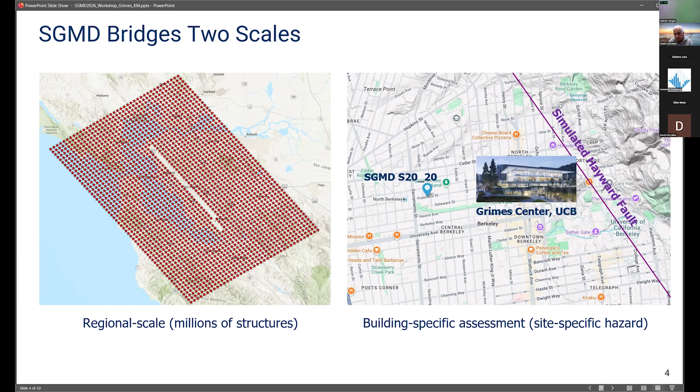One major strength of SGMD is that it bridges multiple scales. At one extreme, we have regional scale hazard affecting millions of buildings. At the other extreme, building-specific response and condition assessment can take place. The Grimes Center is located near a specific SGMD site, site 2020, in Berkeley, and similar to the BART study that I presented earlier, this creates a near collocated relationship between the actual structure and the simulated hazard environment. This is important because it allows the building assessment to remain geographically meaningful rather than relying on generic motions selected from unrelated locations.

The Grimes Engineering Center, for those who do not know, is intended to function as a living lab for resilient design. The project is not simply a design exercise nor an experimental study. I overlooked to acknowledge the SOM engineers who are the designers of the building, and we worked very closely with them. It's actually not design of a building, it's design of the modified building, because the Grimes Center is built on the old Bechtel Center. So SOM were the designers and the ones we worked with closely on this project.

So as I said, this project is not simply a design exercise nor an experimental study. Instead, it creates a closed loop framework: design, test, validate, and improve. Or at least improve in the sense of better understanding of the functionality, the recovery potential following an earthquake. The building is less than a quarter mile from the Hayward Fault, so earthquakes are going to happen, and we're going to see data and results and response.

The building integrates advanced systems, sensing, experiments that took place prior to completing the design, and physics-based simulations. This type of integrated workflow is increasingly important for resilience-oriented infrastructure.

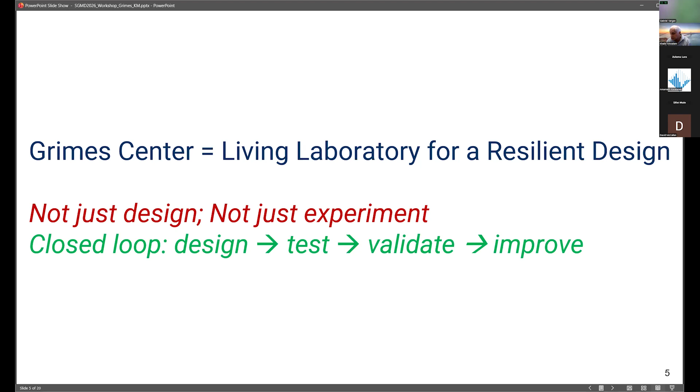The Grimes Center was specifically designed for resilience, rapid recovery, and immediate occupancy after earthquakes. This represents a major shift from traditional collapse prevention philosophy. The objective is not simply to prevent collapse. The objective is functionality, operational continuity, and minimizing downtime. This becomes essential for critical facilities, research buildings, and community infrastructure.

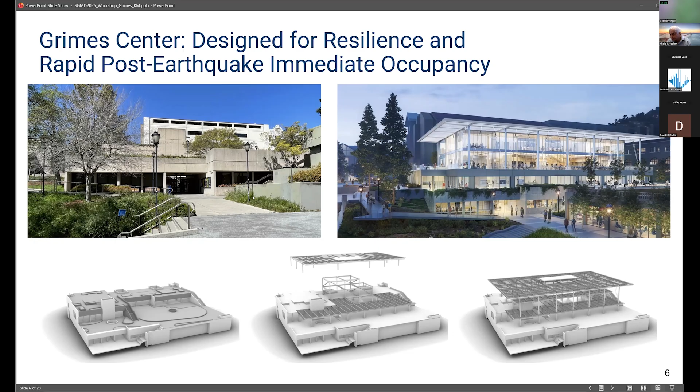This slide here, from SOM, shows the evolution of the structural system. The design progressed through several stages, starting from existing condition, adding buckling restrained braces, interior frames, adding new levels, incorporating shape memory alloy perimeter frames, and ultimately adding the roof structure.

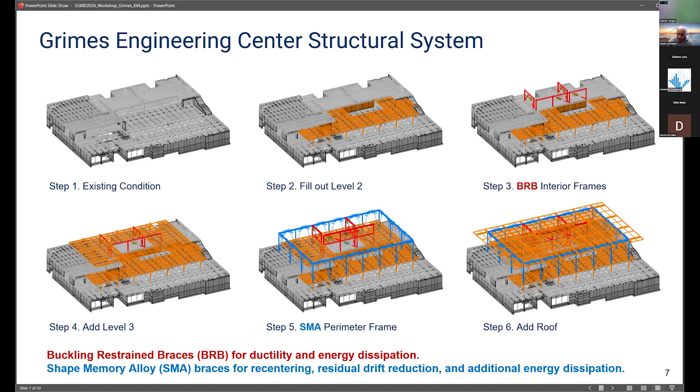Two key systems are central here. First is the buckling restrained braces, or BRBs, which provide ductility, stable hysteretic behavior, and energy dissipation. Second is the shape memory alloy systems, which provide recentering, residual drift reduction, and additional damping. The combination allows the structure to dissipate energy while also limiting permanent deformation.

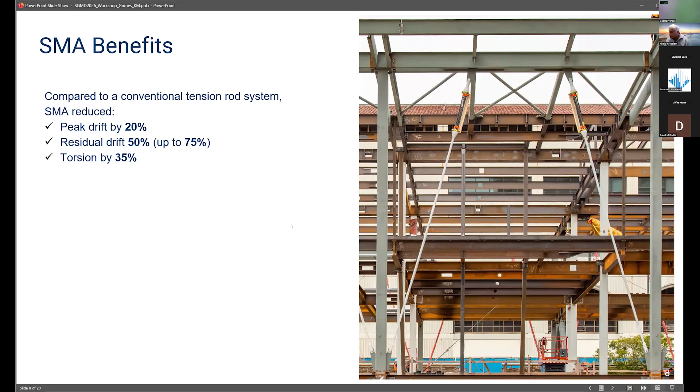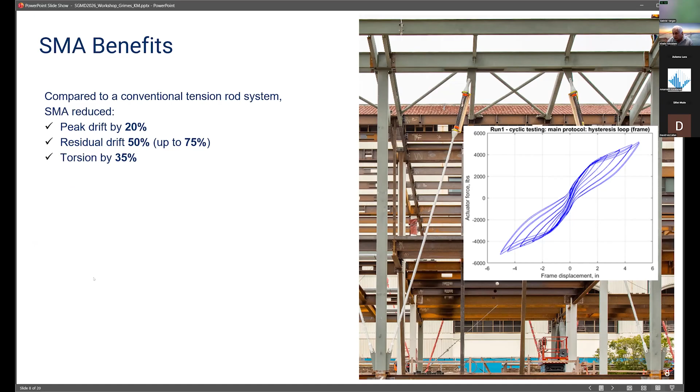This is a summary of the benefits observed from the SMA system. You see here some of the experimental results that show the recentering capability. And the SMA are these cables you see on top here of this tension rod that go all around the perimeter of the building. So compared to conventional tension rod system, peak drift was reduced by introducing the SMA rods. Residual drift was reduced substantially, torsion decreased, and floor accelerations were lowered.

And that's important. The building houses this artwork that's called the Cube, which has thousands of LED lights which serve a particular educational function, which I don't have time to explore today. So it was important to pay attention to that and to have the floor acceleration being lowered, which is very important for functional recovery and so on.

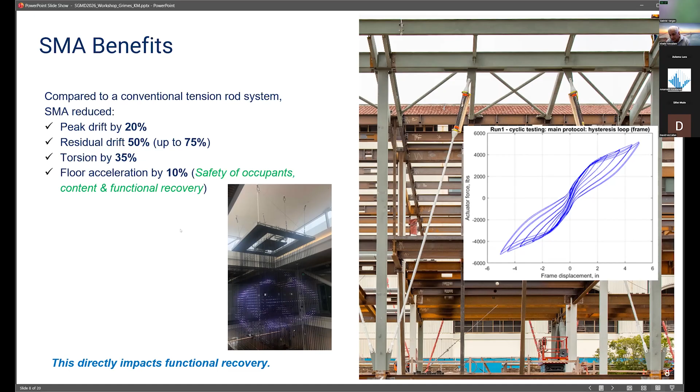The residual drift reduction is particularly important for functional recovery in addition to reduction of the floor acceleration. Many buildings survive earthquakes structurally, but become unusable because of excessive residual deformation. Reducing residual drift directly improves repairability, reoccupancy, and ultimately resilience. This is one of the strongest motivations for advanced resilience systems.

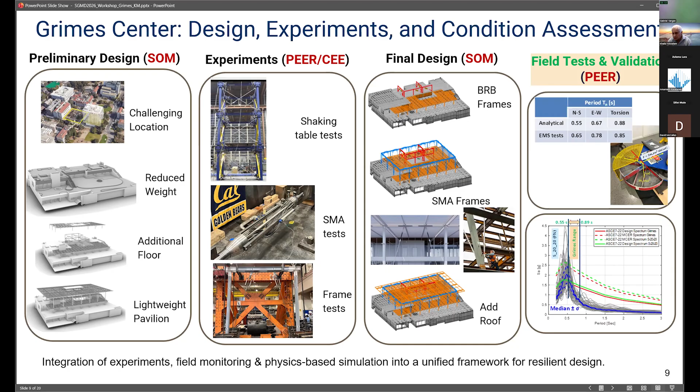The important idea is that resilience assessment should not rely on a single methodology. Instead, resilient design increasingly requires integration across experiment, simulation, sensing, and operational monitoring.

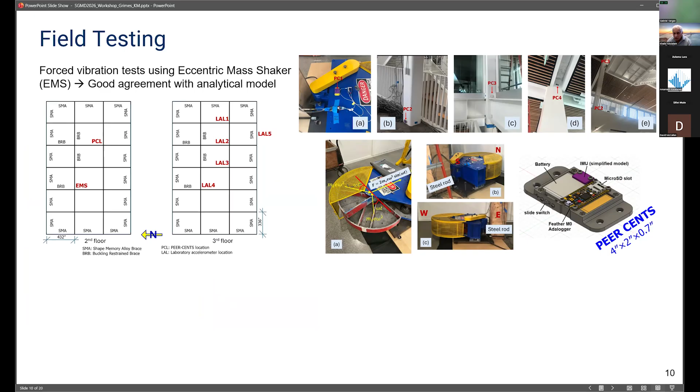Here is a summary of the field testing, also using PEER CENTS that I mentioned when I talked about the bar tests. And here we used an eccentric mass shaker to excite the building after it was constructed. The objective was to identify modal properties, natural frequency, and validate the analytical model. And results were very promising. The measured response showed good agreement with analytical predictions done by SOM engineers. So you see here this table. The field validation is critical for digital twin concepts and longevity of this monitoring and continued learning from this living lab, and of course for resilience-oriented assessment.

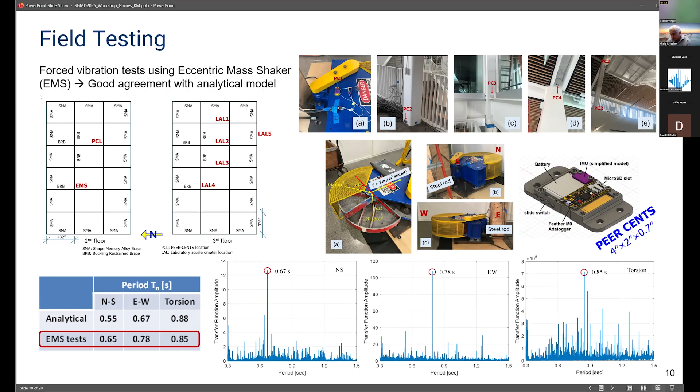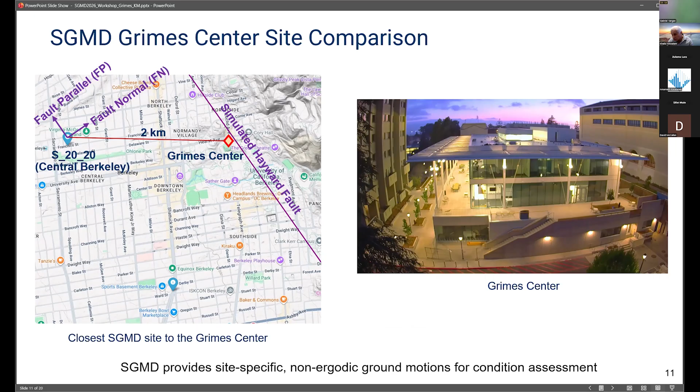As I mentioned, the building is less than a quarter mile from the Hayward Fault, as you see here. The motions, therefore, that we use preserve local site effects, source to site geometry, and the near fault characteristics. This allows SGMD to support, as I mentioned, non-ergodic, geologically meaningful site-specific assessment.

Here we compare SGMD spectra with code-based design and maximum considered earthquake response spectra. An important observation is that some individual motions, here we see the 50 realizations in gray, and then the median plus standard deviation compared to the code. So we see some individual motions exceed MCER near the dominant structure period, which is in the vicinity of 0.6 to 0.8 second. It shows the range here. While the median behavior aligns well with the code spectra.

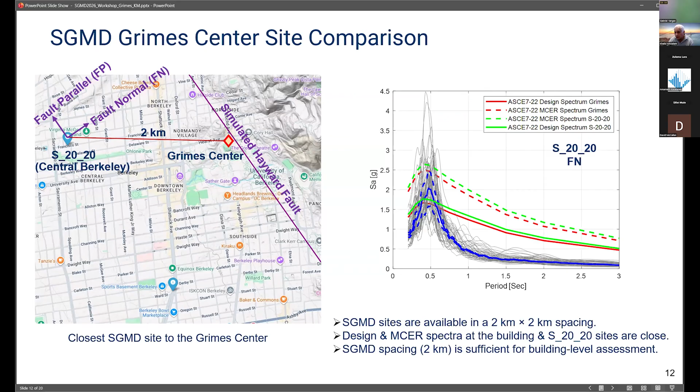One thing, at longer periods, the motions fall below the design spectrum. Why is that? Because code spectra reflect contributions from multiple faults, multiple magnitudes, and the probabilistic hazard aggregation. The SGMD motions here represent a specific magnitude 7 Hayward scenario.

Another important point is the influence of near fault directivity and super shear rupture effects that David mentioned in the morning session, which can amplify long period response. We expect very soon to add more data in the SGMD that would address this issue more properly.

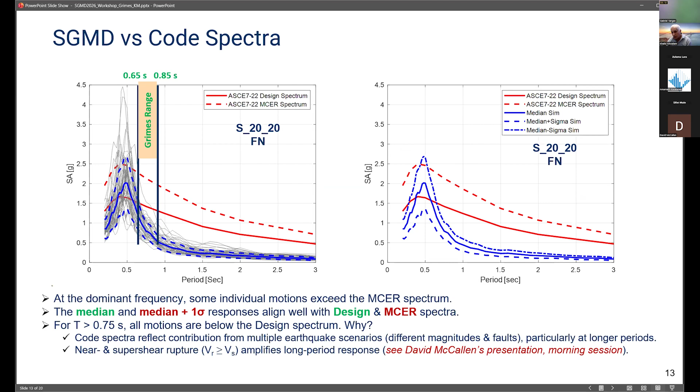This slide shows one explanation of why the code includes more than just one fault, more than just one earthquake scenario. So this slide shows the de-aggregation of the hazard supporting the previous observation regarding code versus SGMD comparison for long period spectral values. For short period, you see the magnitude 7 is equally dominating as the higher magnitudes, but this relative contribution reduces when we start looking at longer period structures here. So that explains that observation.

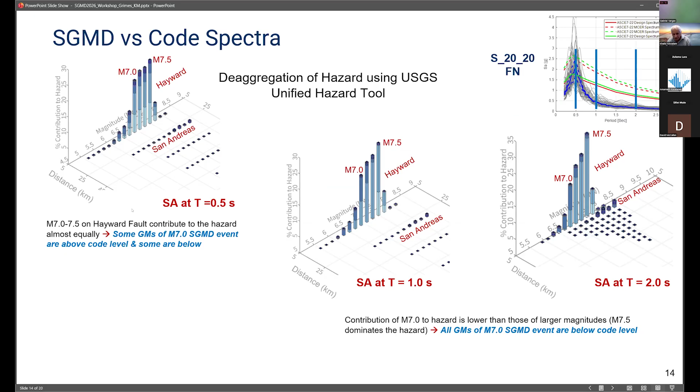So a provoking question here: do we still need to artificially modify, scale, spectrally match, or shape match motions to match code spectra?

Something to think about and discuss in the coming panel discussion tomorrow. Clearly, SGMD provides scenario-consistent motions tied to realistic rupture physics without artificial modification. This is an important conceptual shift. The motions are not intended to create an artificial envelope. Whether this is still needed or not, I think it's worthy of its discussion.

The motions represent physically plausible earthquake scenarios. This may ultimately support more realistic, resilient assessment. But what do we do about addressing the differences with code spectra, and what would engineers be comfortable with? So I'm just pausing this here as a point of discussion for tomorrow.

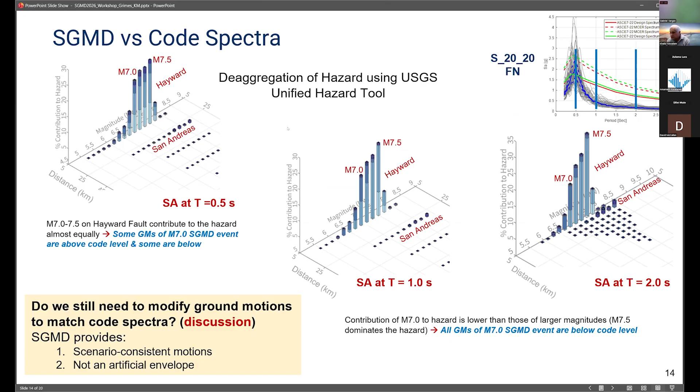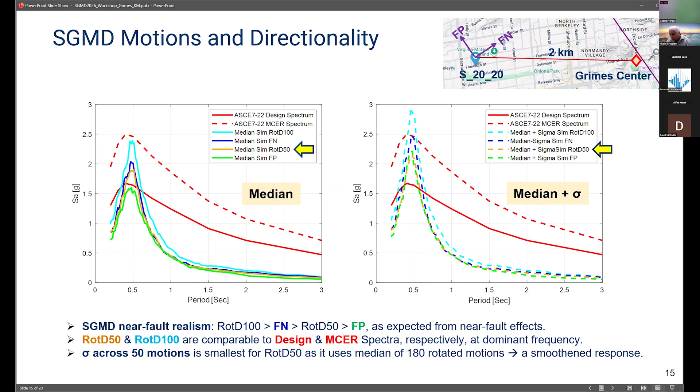Torsion was an issue for this building, so it was important to look at that, and pulse-sensitive structures, as we heard in the morning. As part of this exercise, we also examined pulse periods and spectral velocity behavior. The pulse period is close to the natural period range of the Grimes Center. This was obtained with wavelets.

This is important because when pulse period approaches structural period, demand amplification can become significant, and we had a discussion about that in the morning. This is one of the major concerns for near-fault structures. The slide also illustrates the increasing dispersion at longer periods, which also relates to what I mentioned earlier.

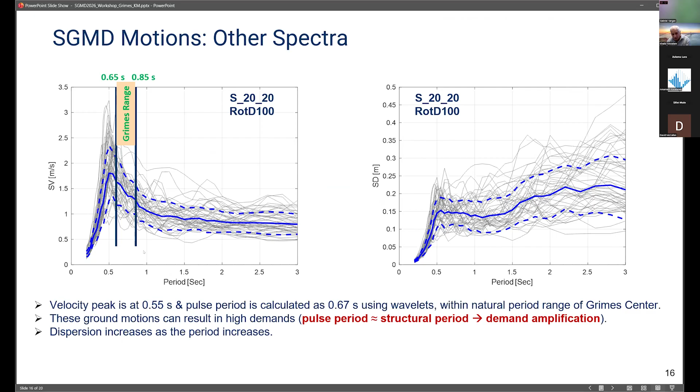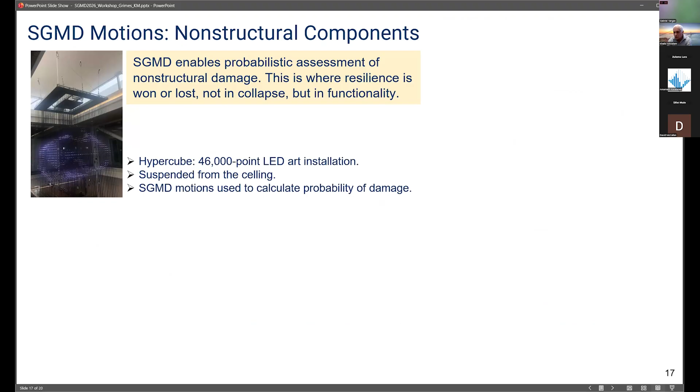One important thing we went through is shown in this slide, which is particularly important because resilience is often governed by non-structural systems. The hypercube LED installation in the Grimes Center was evaluated probabilistically using the ASCE 7 equation to estimate the peak floor acceleration.

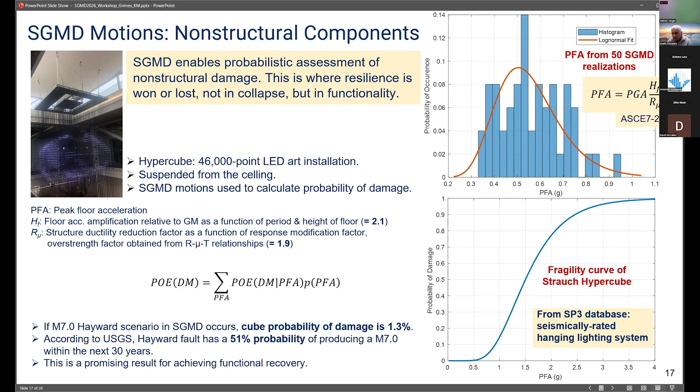The calculated damage probability was very low, which is encouraging because collapse prevention alone does not guarantee functionality. Many resilience failures originate from non-structural damage. This is where SGMD becomes especially powerful: probabilistic assessment of non-structural performance under geographically realistic motions.

This is now a look into the future, what SGMD can offer. I'll do this quickly, I'm running out of time. So here we expand the discussion to regional scale assessment. The scenario involves,

Yes, the music means I should stop. I'll take one more minute and then... No, please finish, go on, go on. Yeah, it's okay, it's an automated thing. Yeah.

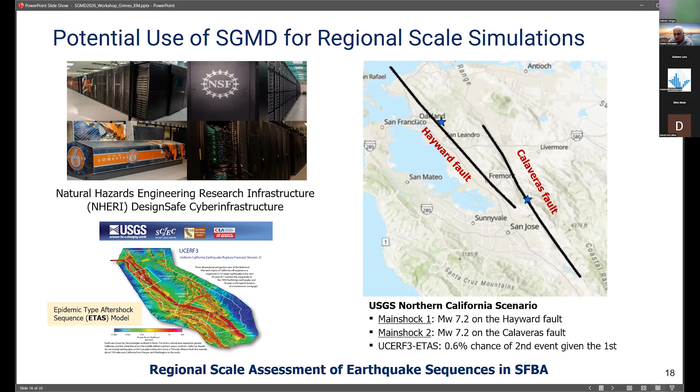Okay, so the scenario involves a Hayward main shock followed by a Calaveras event. The same thing we did also for the BART, consistent with ETAS sequence concepts. So this demonstrates how SGMD might be able to eventually support earthquake sequence simulation, cascading hazard assessment, and regional resilience evaluation. So this is part of a project we have.

I'm putting this here to emphasize discussion for future directions that SGMD may be interested in looking into: ETAS-based sequence scenarios, multi-event hazard chains, and regional resilience simulation, which is very important if we are going to speak about digital twins of cities, operational decision-making, and infrastructure risk management.

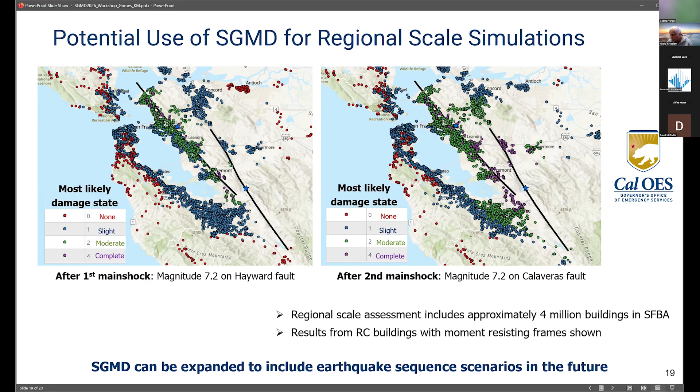If you look carefully, you see here, for example, a lot of the blue points become green when the second main shock is applied. So that would be another thing to consider for future discussion.

So to conclude, SGMD provides site-specific, scenario-consistent, physics-based ground motion. It enables assessment without relying entirely on artificial spectral matching. It supports structural systems, non-structural systems, single building analysis, and hopefully eventually regional scale resilience assessment. And we saw some of that already.

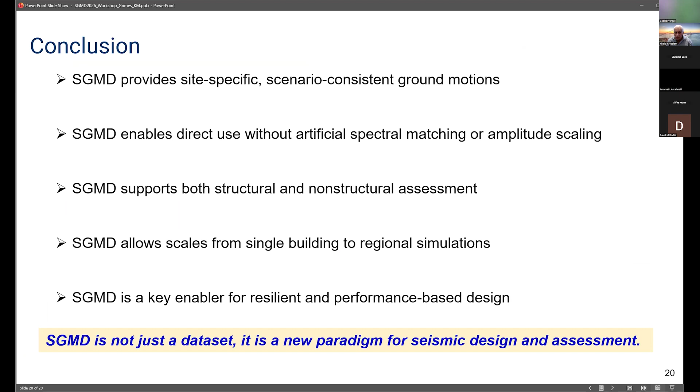Most importantly, SGMD is not simply a database. It represents a fundamentally new paradigm for seismic design, resilience assessment, and future infrastructure decision making.